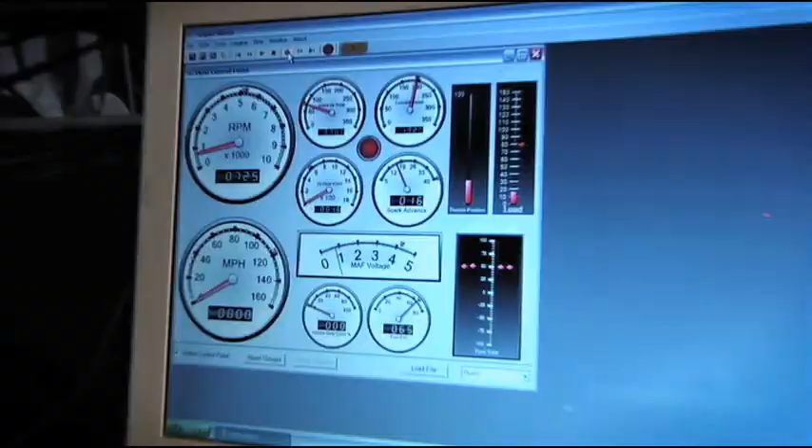The tuner comes with what Sniper calls Special Forces, a program that lets you create a base map for virtually any late model Ford engine combination. Once you build your base file, you'll use either the Delta Force or Commando tuning software to calibrate your ECU. The difference between the two is that Delta Force is designed to allow tuners and dealers to build calibrations for multiple vehicles.

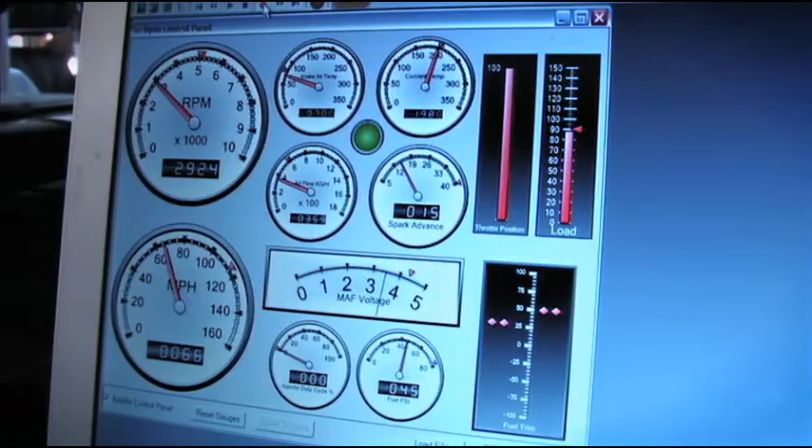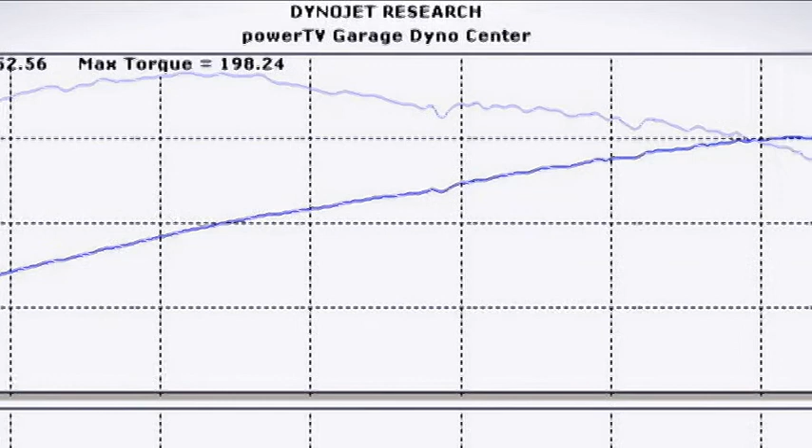The first thing we're going to do is put the car on the dyno and get some baseline numbers so we know where we're starting. Our baseline dyno runs gave us an average of 152 horsepower and 198 pound-feet of torque. Now let's take the car back off the dyno and start turning some wrenches.

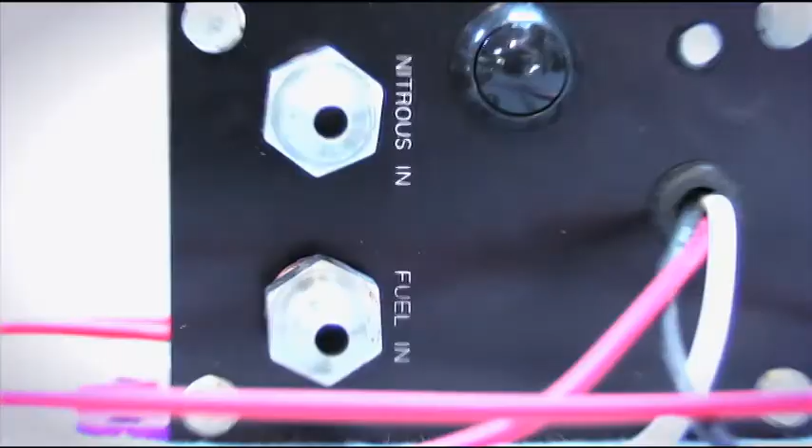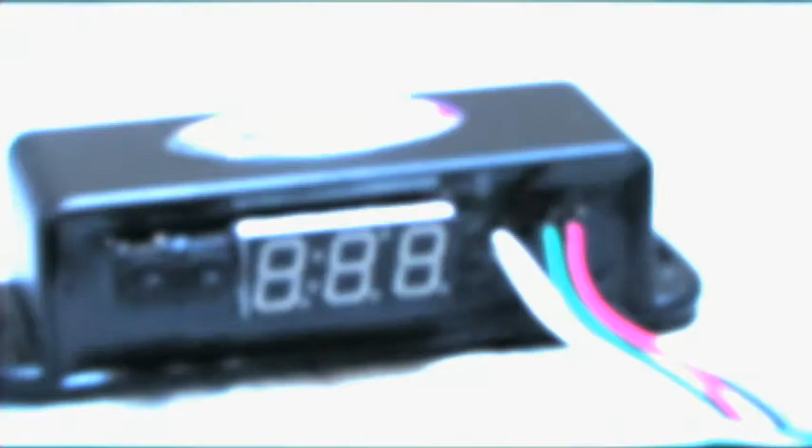The Zex Nitrous Kit we're going to be installing is Mustang specific, so it has the fittings we need to tap into the returnless fuel system, as well as having a nitrous line that's appropriately sized. The nitrous management unit has a built-in throttle position sensor interface that allows us to tap directly into the TPS line for activation purposes. We're also going to be using a Zex RPM window switch that will allow us to turn the nitrous on and off at specific RPM points, as well as selecting what gear we want the nitrous to activate in.

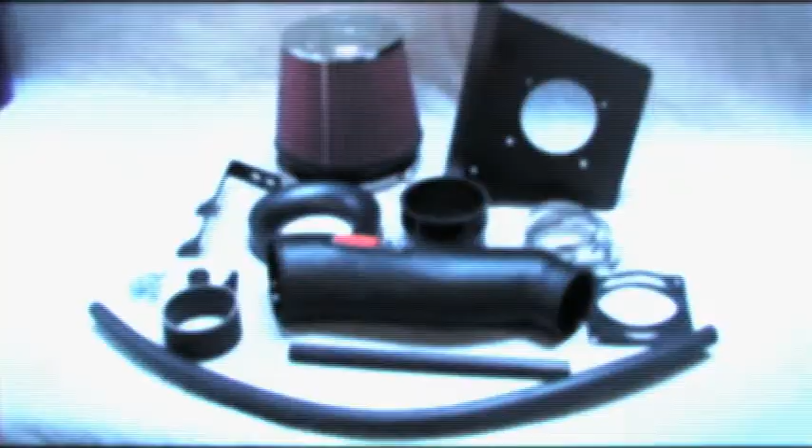Our K&N intake is from their FIPK line and will offer increased fuel economy and better performance whether we're on the bottle or not. Unlike traditional nitrous systems, the Zex NMU packages all the components into a single box, making installation much easier.

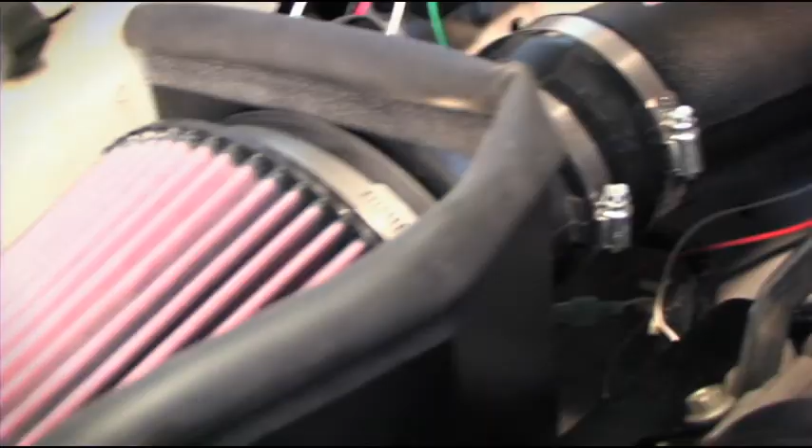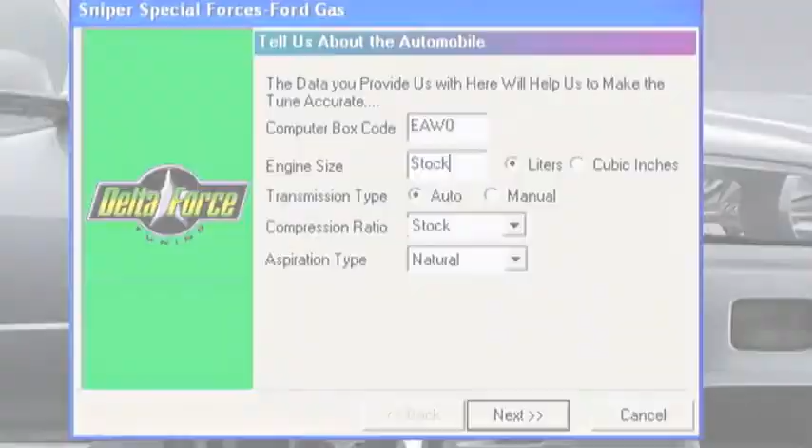With the Zex Nitrous and K&N intake installed, it's time to get the Commando software up and running so we can tune our Mustang. To use the software, first follow the steps to retrieve the stock tune off your ECU. Once you have the stock tune transferred to your PC, Special Forces will create a custom base file by asking you a series of questions. Make sure to enter your computer box code found on your ECU. It will be 3 letters and 1 number. Follow through the prompts, changing options that fit your needs.

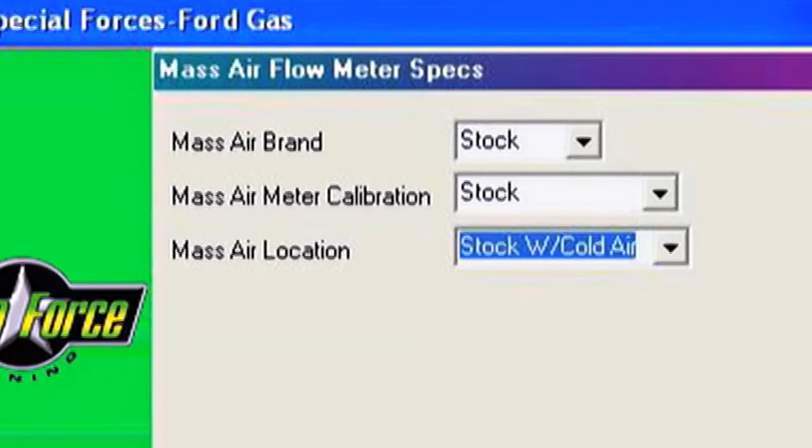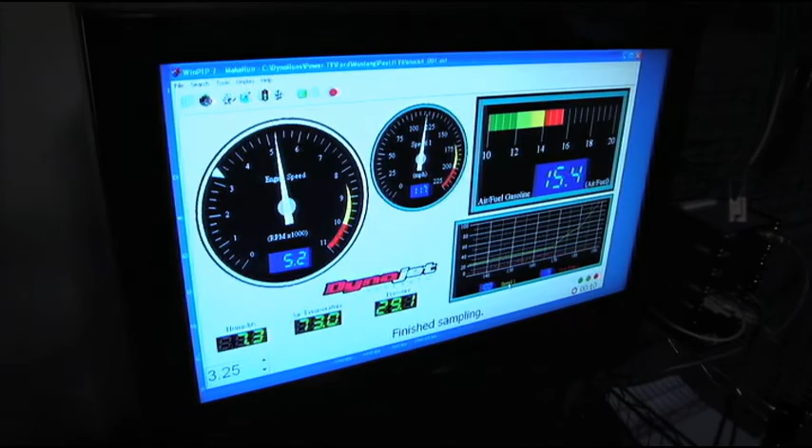To keep the transmission from downshifting on the dyno, we locked the automatic into 3rd. You will need to deselect this once you're done on the dyno. You will now have a custom tune file based on the answers you chose. It's time to test it on the dyno. The program tune picked up 3 horsepower. From there, we decided to modify the tune a bit.

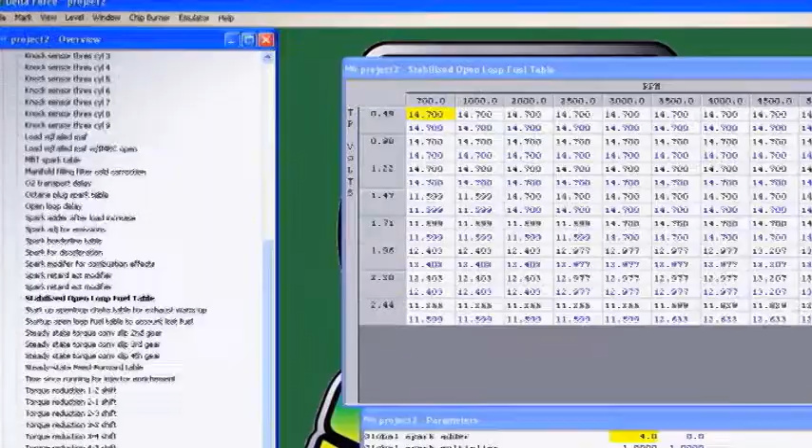You can then load the tune file back into Special Forces, advancing the screens to bring up basic fuel and timing adjustments. If you happen to have the Delta Force or Commando tuning software, you can modify your tune like a full standalone by loading your tune and template file. You can compare 2 tune files that will highlight the areas that were changed between them. Be careful though, the tuner will do exactly what it's told, so attention to detail is critical. The tuner will also hold up to 5 tune files and your stock file.

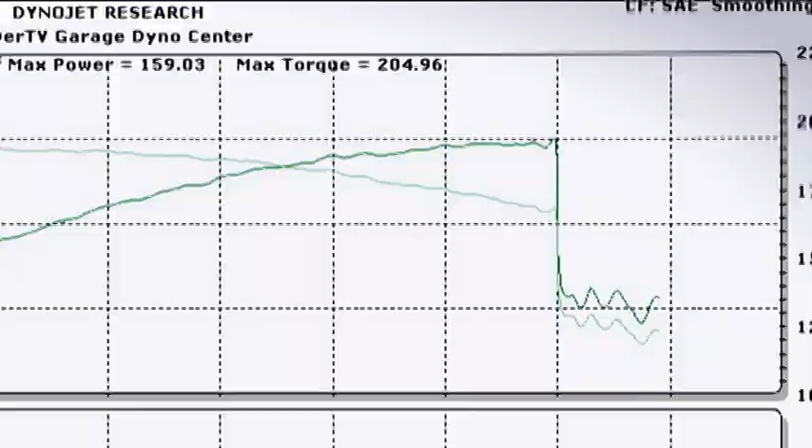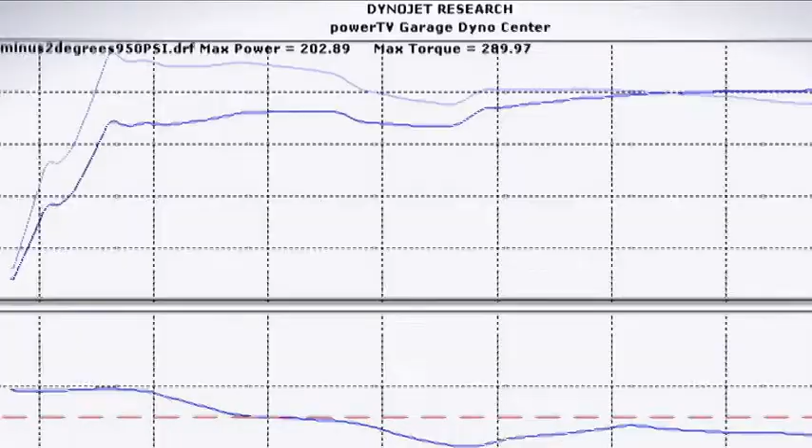With some slight fuel and ignition changes, we netted a total gain of 7 horsepower and 6 foot-pounds, which were gains we were happy with. For our Zex Nitrous runs, we pulled 2 degrees of timing from the stock tune and lowered the IMRC crossover point so it wouldn't occur during nitrous activation. The gains on the 50 shot increased the horsepower by 50 and torque by 91.

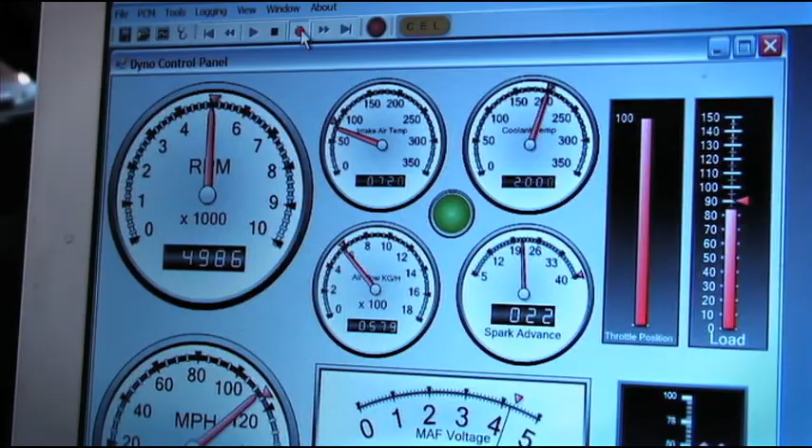Overall, the K&N intake and Zex Nitrous Kit performed great and we were able to data log the runs as we made changes along the way. The Commando tuning software by Sniper gave us exactly what we needed to create great power on and off the nitrous.